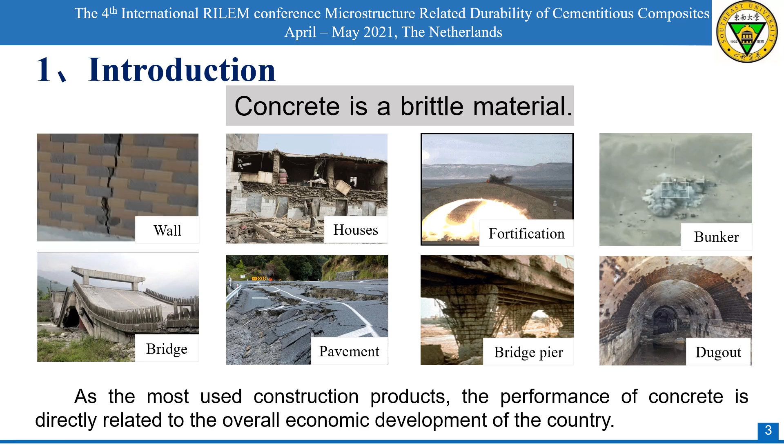As we all know, UHPC is famous for its super high strength and high durability. However, the tensile strain of UHPC is generally low, which still can't resist the damage caused by strong vibration. In recent years, T-HDCC is developed. This is a new type of fiber-reinforced cementitious composites. It's famous for its ultra-high tensile strength and high toughness.

However, T-HDCC uses PVA fibers. This fiber is a hydrophilic fiber, which is generally used to prepare low-strength matrix. Therefore, the compressive strength of T-HDCC is low. Based on these two materials, UHS-HDCC is developed.

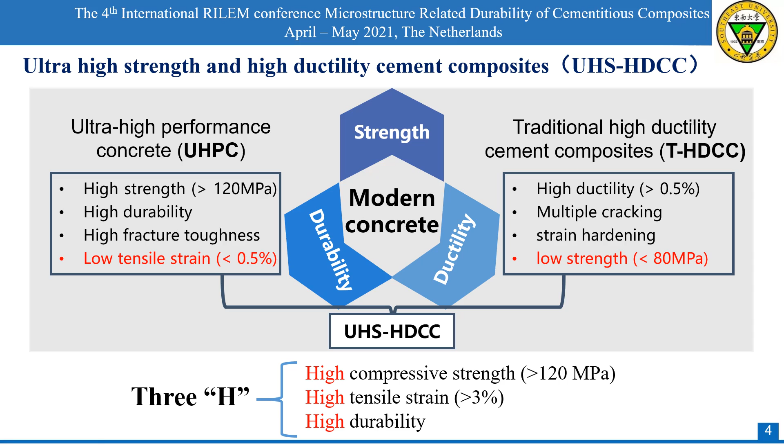It refers to a special fiber-reinforced cementitious composites with compressive strength greater than 120 MPa, tensile strain greater than 3%, and shows strain hardening behavior and multiple cracking characteristics. The excellent performance of UHS-HDCC makes it have better potential when it is used to resist high vibration in buildings. UHS-HDCC is mainly used in antiseismic nodes, anti-blast structures, bridge deck pavement, and high-rise buildings.

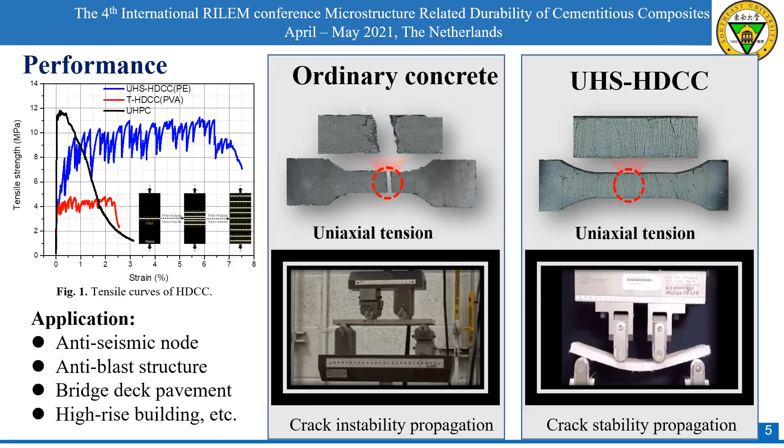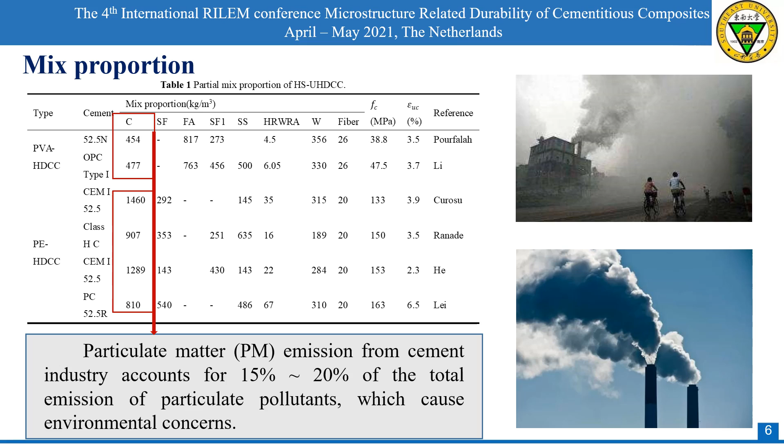Table 1 shows the main mixing ratios for preparing UHS-HDCC and T-HDCC at present. It can be found that the cementitious material contains cement and silica fume, and the amount of cement is more than that in T-HDCC. The production of cement produces PM, which causes environmental problems. Waste glass has brought some troubles to the society, such as stacking occupying farmland, being non-biodegradable, and high recycling costs.

Being amorphous and containing large amounts of silicon, glass should be an excellent pozzolanic material for the concrete industry. Therefore, when glass is finely ground to powder, in theory, it could be used as partial cement replacement. Of course, glass also has a very high amount of sodium oxide, which is a source for alkali-silica reaction. However, there have been research reports that waste glass powder with a particle size of less than 75 microns basically removes the negative effects caused by ASR expansion. Therefore, it is a feasible solution to use waste glass powder instead of cement to prepare UHS-HDCC.

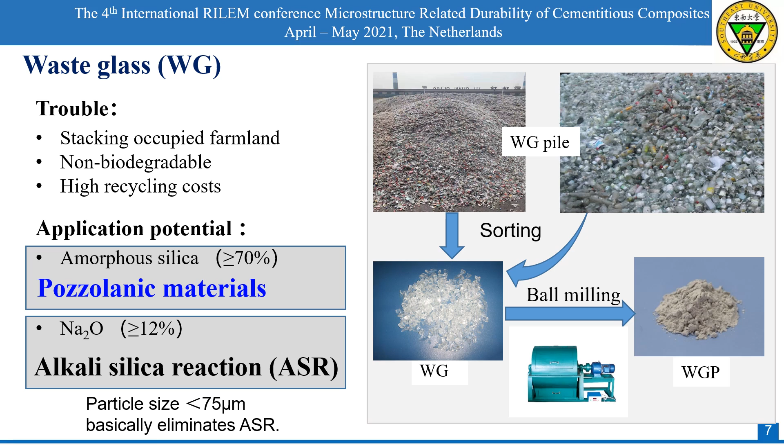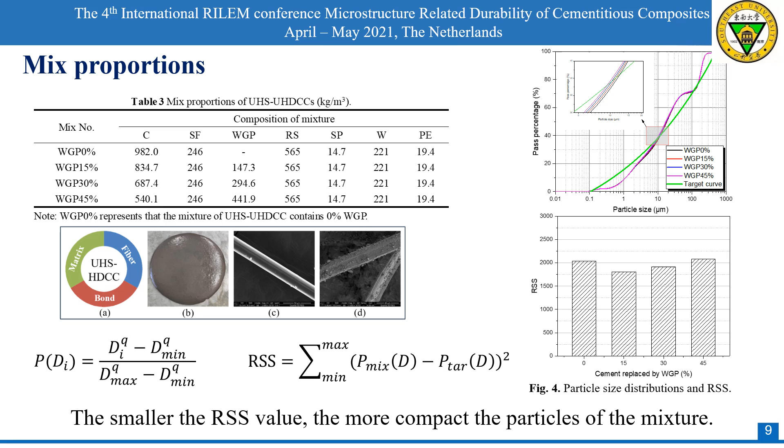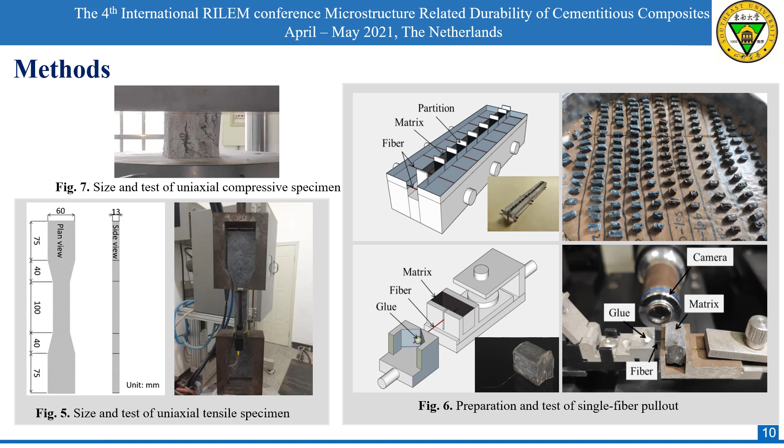Here are the characteristics of the raw material. The mixing ratio of the matrix is calculated according to the tightest packing theory of particles. The smaller the RSS, the more compact the particles of the matrix. This is the experimental test method, including compressive strength test, uniaxial tensile test, and a single fiber pull-out test.

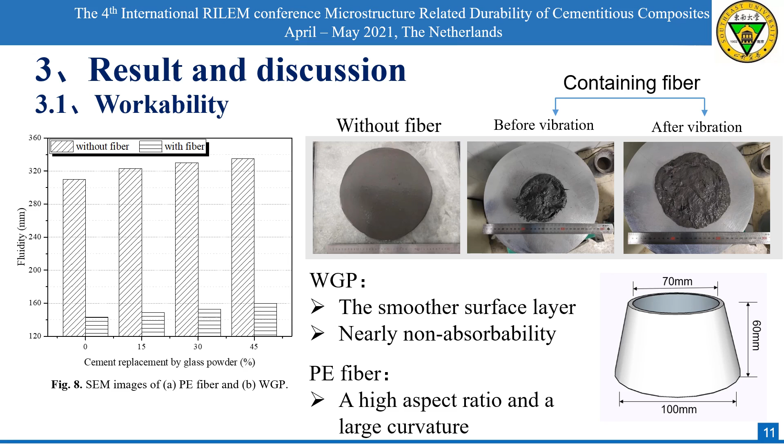However, the fluidity of the fresh fiber mixture with WGP is slightly improved. The change may be attributed to the smoother surface layer and nearly non-absorbability of WGP. Figure 9 shows the effect of WGP on the compressive strength and the flexural strength of UHS-HDCC at different curing ages. The pH value of the pore solution improves the dissolution rate of WGP. It can be found that 15% WGP has a positive effect on compressive strength and flexural strength.

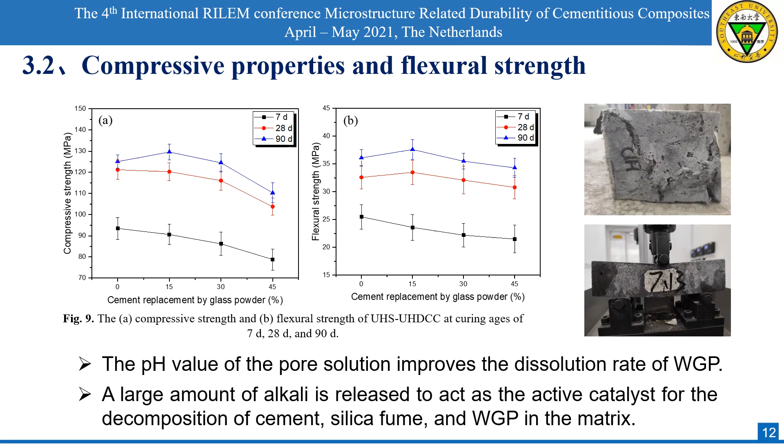Figure 10 shows the effect of WGP on the tensile performance of UHS-HDCC. All samples showed strain hardening characteristics and multiple cracking behavior. The initial cracking tensile strength and ultimate tensile strength of UHS-HDCC reached the maximum at 15% WGP, and then decreased with the increase of WGP.

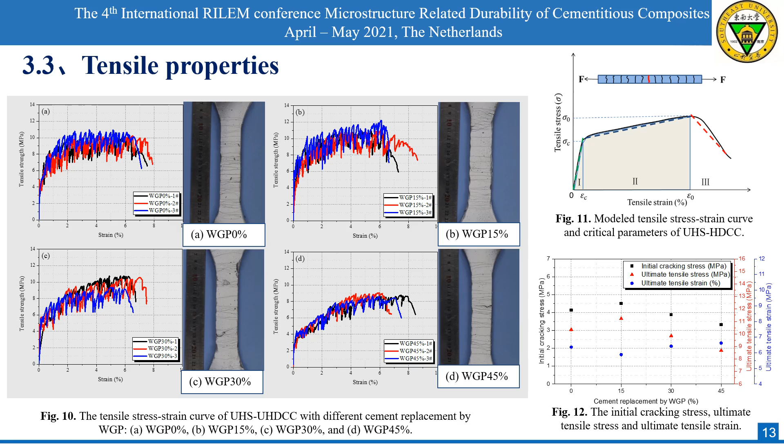The single fiber pull-out test is essential to determine the fiber and matrix interaction properties, which describes the micro-mechanical features of UHS-HDCC and builds a relationship with the tensile strain capacity. The embedded length of fiber is 6 mm. The fibers were damaged after extraction. There is no fracture. All fibers showed slip hardening during the pull-out process. In addition, due to incorporation of WGP, different degrees of damage occurred at the fiber pull-out end.

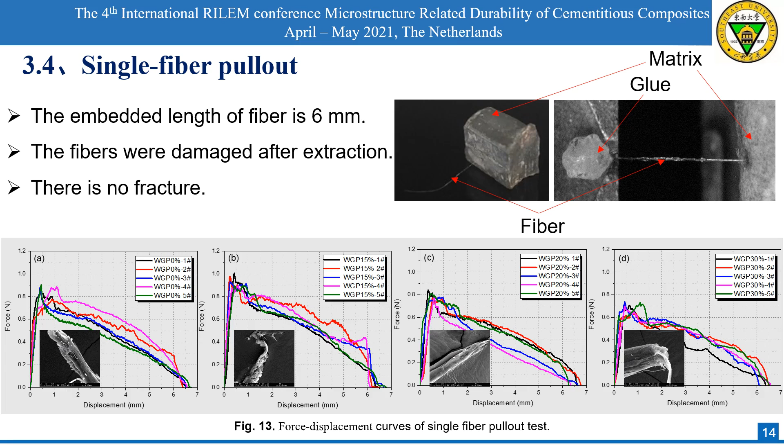Fig 14 presents the frictional bond stress and slip hardening coefficient between the fiber and the matrix. When WGP content is 15%, the maximum of the frictional bond stress was 1.96 MPa. The large frictional bond strength represents the large load required in the tensile process. It can be seen from Figure 15 that the maximum fiber bridging stress has occurred in the specimen of WGP 15% and then tends to decrease when the WGP content exceeds 15%.

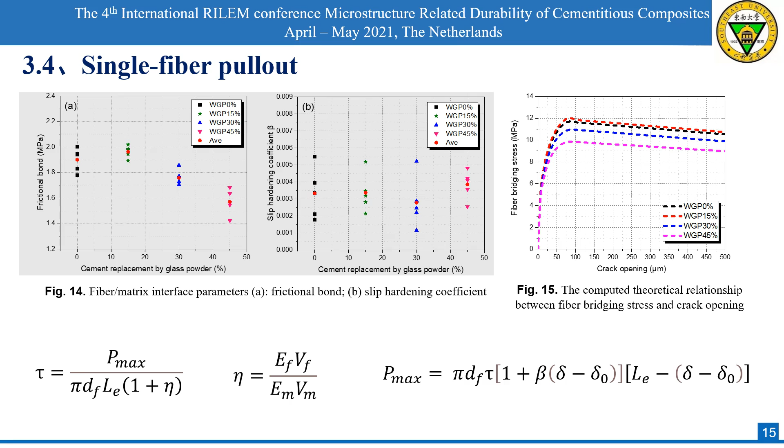The last part, conclusions. The introduction of WGP improves the fluidity of UHS-HDCC. The compressive strength and flexural strength of UHS-HDCC were improved by adding 15% WGP. All the UHS-HDCC specimens exhibited an obvious tensile strain hardening phenomenon and uniformly distributed cracks. Particularly, the ultimate tensile ductility of UHS-HDCC reached 6.62% when adding 15% WGP.

All the single fiber force displacement curves of UHS-HDCC specimens exhibited a slight slip-hardening behavior. The fiber and matrix interfacial average frictional bond stress tends to increase first and then decrease with the addition of WGP.